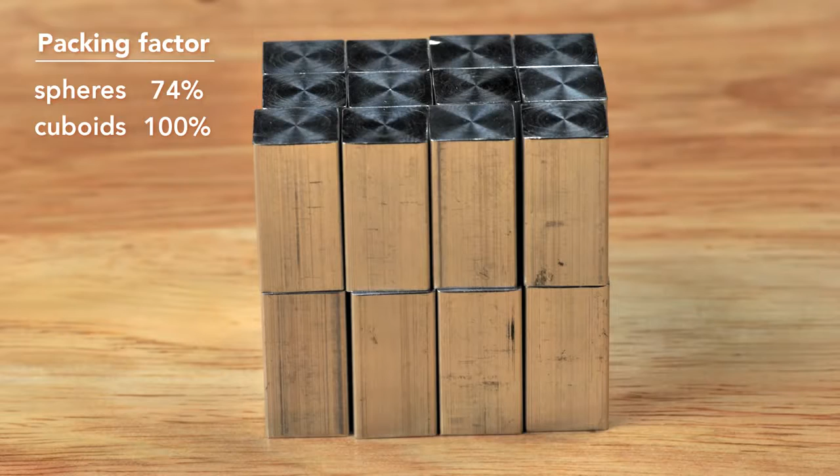But the cuboid surpasses the sphere in packing efficiency. It has almost no wasted space, although at the sacrifice of using more surface area to contain the same volume as the sphere. So, to create a can, engineers use a cylinder, which has elements of both shapes.

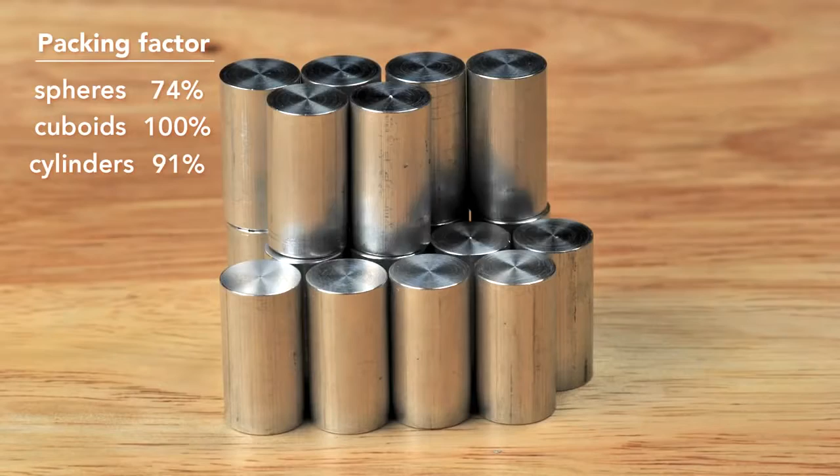From the top, it's like a sphere, and from the side, it's like a cuboid. A cylinder has a maximum packing factor of about 91%, not as good as the cuboid, but better than the sphere. Most important of all, the cylinder can be rapidly manufactured.

The can begins as this disc called a blank, punched from an aluminum sheet about 3/10 of a millimeter thick. The first step starts with a drawing die, on which sits the blank and then a blank holder that rests on top. We'll look at a slice of the die so we can see what's happening.

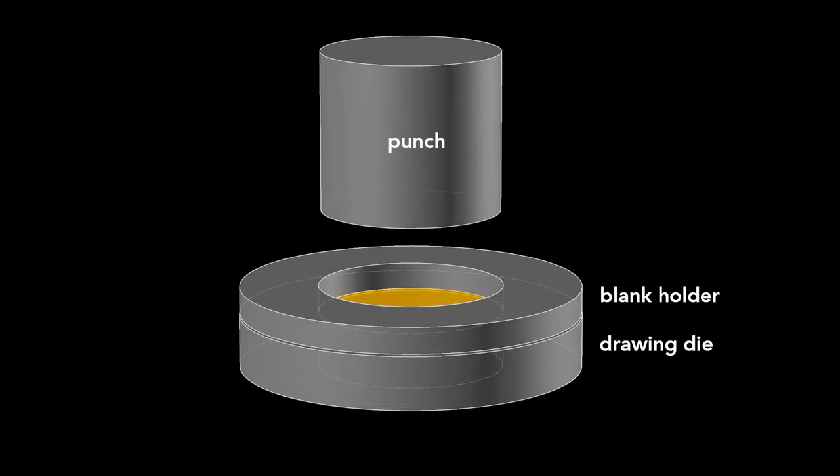A cylindrical punch presses down on the die, forming the blank into a cup. This process is called drawing. This cup is about 88 millimeters in diameter, larger than the final can, so it's redrawn.

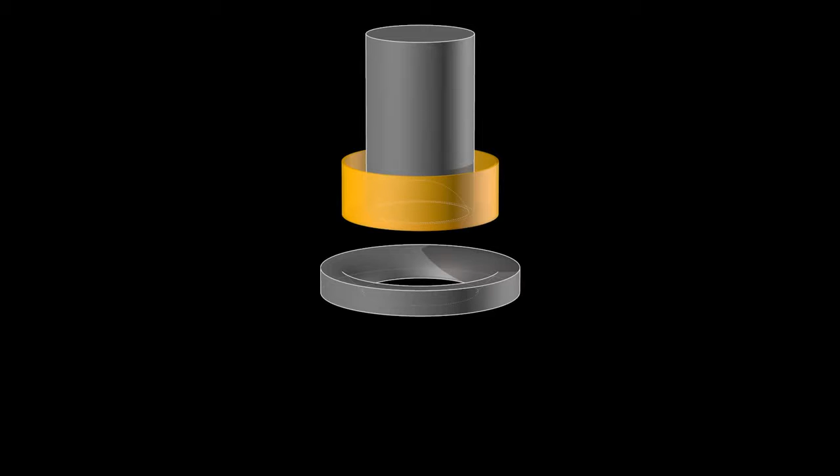That process starts with this wide cup and uses another cylindrical punch and a redrawing die. The punch presses the cup through the redrawing die and transforms it into a cup with a narrower diameter, which is a bit taller. This redrawn cup is now the final diameter of the can, 65 millimeters, but it's not yet tall enough. A punch pushes this redrawn cup through an ironing ring.

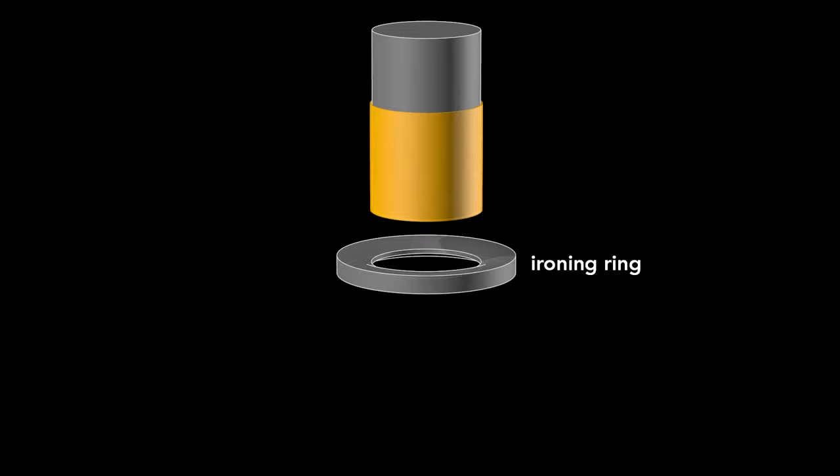The cup stays the same diameter as it becomes taller and the walls thinner. If we watch this process again up close, you see the initial thick wall and then the thinner wall after it's ironed. Ironing occurs in 3 stages, each progressively making the walls thinner and the can taller.

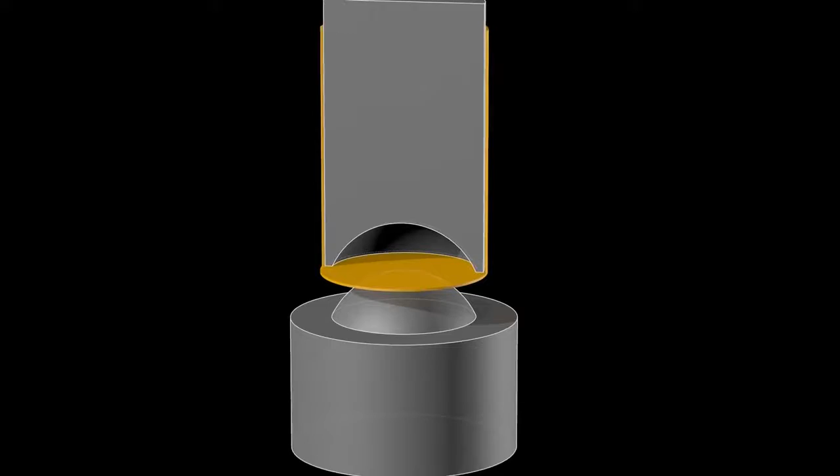After the cup is ironed, the dome on the bottom is formed. This requires a convex doming tool and a punch with a matching concave indentation. As the punch presses the cup downward into the doming tool, the cup bottom then deforms into a dome. That dome reduces the amount of metal needed to manufacture the can. The dome bottom uses less material than if the bottom were flat.

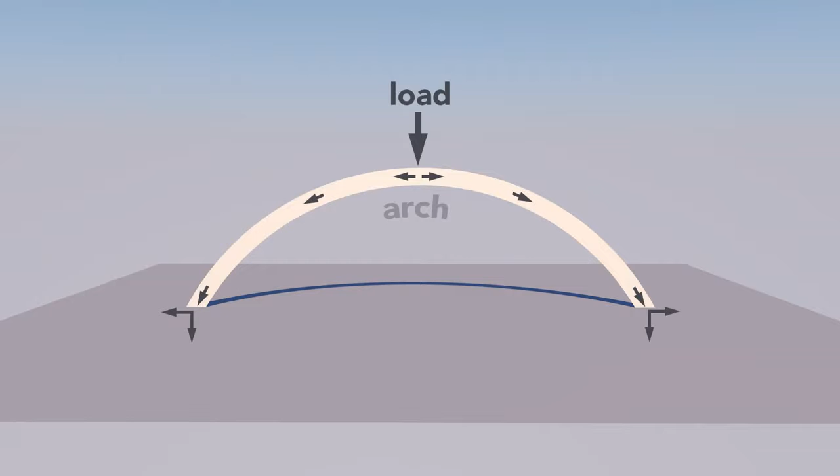A dome is an arch revolved around its center. The curvature of the arch distributes some of the vertical load into horizontal forces, allowing a dome to withstand greater pressure than a flat beam.

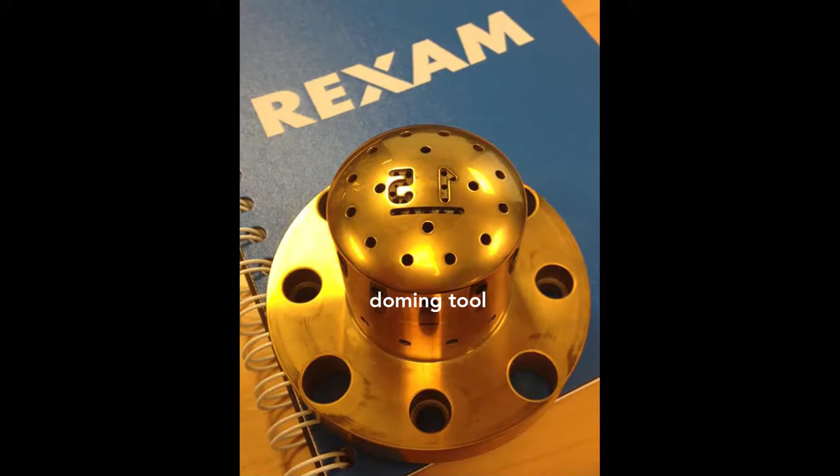On the dome, you might notice 2 large numbers. These debossed numbers are engraved on the doming tool. The first number signifies the production line in the factory, and the second number signifies the body maker number. The body maker is the machine that performs the redrawing, ironing, and doming processes. These numbers help troubleshoot production problems in the factory. In that factory, the manufacturing of a can takes place at a tremendous rate.

These last 3 steps, redrawing, ironing, and doming, all happen in one continuous stroke in only 1/7 of a second. The punch moves at a maximum velocity of 11 meters per second and experiences a maximum acceleration of 45 Gs. This process runs continuously for 6 months, or around 100 million cycles, before the machine needs servicing.

Now, if you look closely at the top of the can body, you see that the edges are wavy and uneven. These irregularities occur during the forming. To get a nice, even edge, about 6 millimeters is trimmed off of the top. With an even top, the can can now be sealed.

But before that sealing occurs, a colorful design is printed on the outside. The term of art in the industry is decoration. The inside also gets a treatment: a spray-coated epoxy lacquer separates the can's contents from its aluminum walls. This prevents the drink from acquiring a metallic taste and also keeps acids in the beverage from dissolving the aluminum.

The next step forms the can's neck, the part of the can body that tapers inward. This necking requires 11 stages. The forming starts with a straight-walled can. The top is brought slightly inward, and then this is repeated further up the can wall until the final diameter is reached. The change in neck size at each stage is so subtle that you can barely tell a difference between one stage and the next.

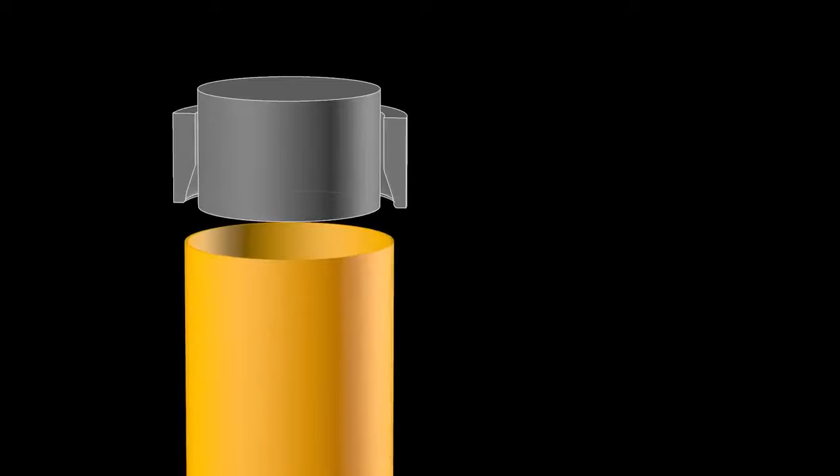Each one of these stages works by inserting an inner die into the can body, then pushing an outer die, called the necking sleeve, around the outside. The necking sleeve retracts, the inner die retracts, and the can moves to the next stage. The necking is drawn out over many different stages to prevent wrinkling or pleating of the thin aluminum.

Since the 1960s, the diameter of the can end has become smaller by 6 millimeters, from 60 millimeters to 54 millimeters today. This seems a tiny amount, but the aluminum can industry produces over 100 billion cans a year, so that 6 millimeter reduction saves at least 90 million kilograms of aluminum annually. That amount would form a solid cube of aluminum 32 meters on a side. Compare that to a 787 Dreamliner with a 60-meter wingspan.

Now, after the neck has been formed, the top is flanged. That is, it flares out slightly and allows the end to be secured to the body, which brings us to the next brilliant design feature, the double seam.

On older steel cans, manufacturers welded or soldered on the ends. This often contaminated the can's contents. In contrast, today's cans use a hygienic double seam, which can also be made faster. This can is cut in half so you can see the cross-section of the double seam.

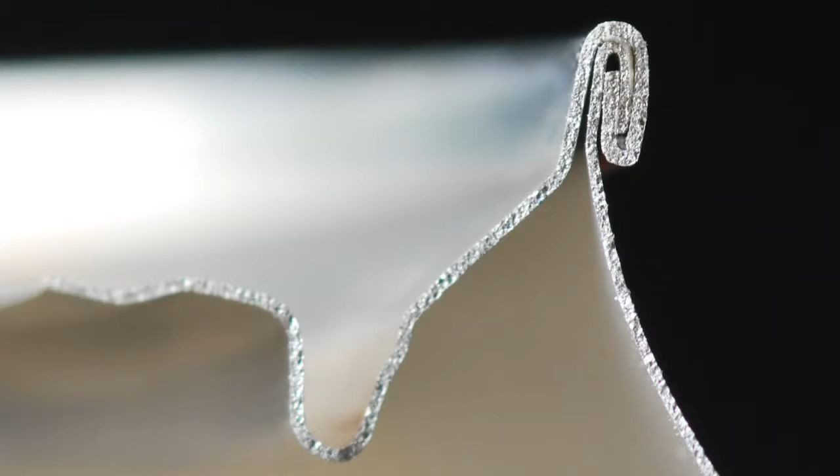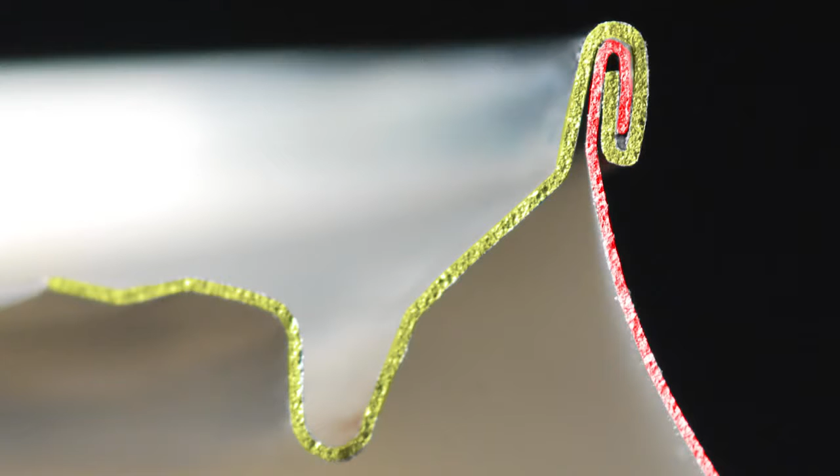To create this seam, a machine uses two basic operations. The first curls the end of the can cover around the flange of the can body. The second operation presses the folds of the metal together to form an airtight seal. While the operations themselves are simple, they require high precision. Parts misaligned by a small fraction of a millimeter cause the seam to fail.

In addition to the clamping of the end and can body, a sealing compound ensures that no gas escapes through the double seam. The compound is applied as a liquid, then hardens to form a gasket. The end, attached immediately after the can is filled, traps gases inside the can to create pressures of about 30 psi, or 2 times atmospheric pressure. In soda, carbon dioxide produces the pressure. In non-carbonated drinks like juices, nitrogen is added.

So why is a beverage can pressurized? Because the internal pressure creates a strong can despite its thin walls. Squeeze a closed, pressurized can, it barely gives. Then, squeeze an empty can. It flexes easily, the can walls are thin, only 75 microns thick, and they're flimsy. But the internal pressure of a sealed can pushes outwards equally and so keeps the wall in tension.

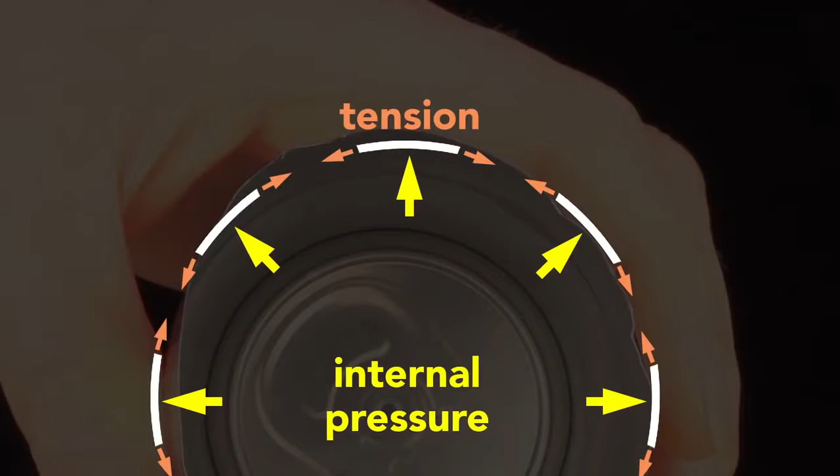This tension is key. The thin wall acts like a chain: in compression it has no strength, but in tension it's very strong. The internal pressure strengthens the cans so they can be safely stacked. A pressurized can easily supports the weight of an average human adult, and it adds enough strength that the can doesn't need corrugations like in this unpressurized steel food can.

While initially pressurized to about 2 atmospheres, a can may experience up to 4 atmospheres of internal pressure in its lifetime due to elevated temperatures, so the can is designed to withstand up to 6 atmospheres, or 90 psi, before the dome or the end will buckle.

Why is there a tab on the end of the can? It seems a silly question—how else would you open it? But originally, cans didn't have tabs. Very early steel cans were called flat tops for pretty obvious reasons. You'd use a special opener to puncture a hole to drink from and a hole to vent.

In the 1960s, the pull tab was invented so that no opener was needed. The tab worked like this: you lift up this ring to vent the can and pull the tab to create the opening. Easy enough, but now you've got this loose tab.

The cans ask you to please don't litter, but sadly these pull tabs got tossed on the ground, where the sharp edges cut the bare feet of beachgoers or harmed wildlife. So the beverage can industry responded by inventing the modern stay-on tab.

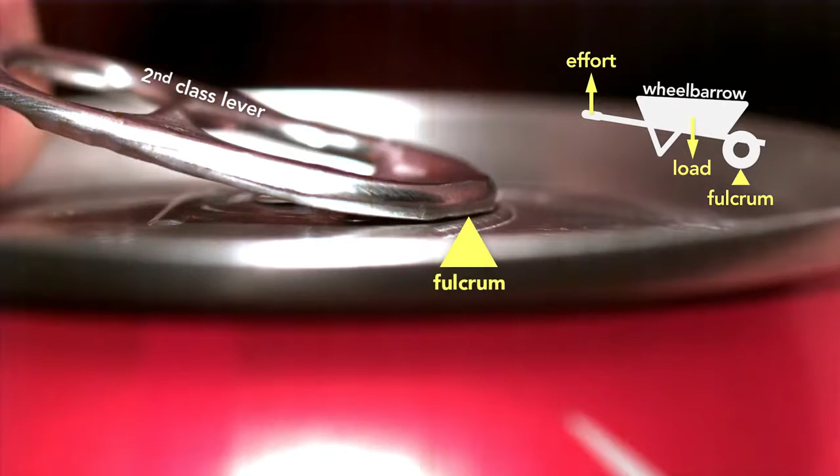This little tab involved clever engineering. The tab starts as a second-class lever—like a wheelbarrow—because the tip of the tab is the fulcrum and the rivet the load. The effort is being applied on the end.

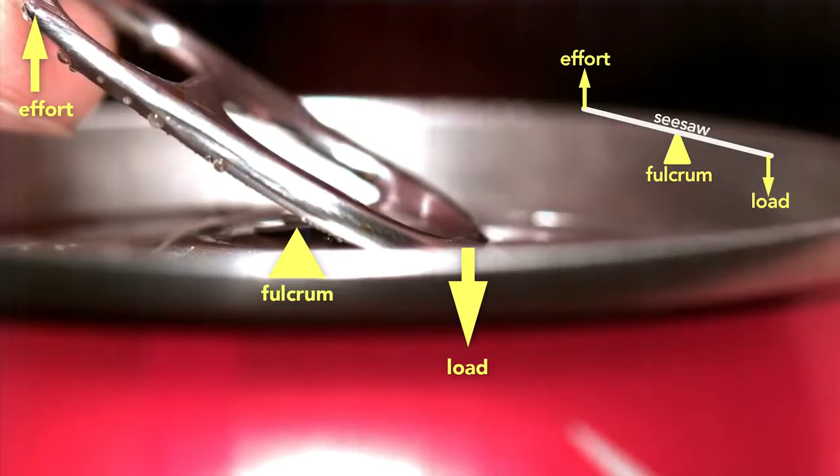But here's the genius part: the moment the can vents, the tab switches to a first-class lever, which is like a seesaw, where the load is now at the tip and the fulcrum is the rivet. You can see clearly how the tab, when working as a wheelbarrow, lifts the rivet.

Part of the reason this clever design works is because the pressure inside the can helps force the rivet up, which in turn depresses the outer edge of the top until it vents the can, and then the tab changes to a seesaw lever. Looking from the inside of the can, you can see how the tab first opens near the rivet.

If you try to simply force the scored metal section into the can using the tab as a first-class lever with the rivet as the fulcrum throughout, you'd be fighting the pressure inside the can—the tab would be enormous and expensive.